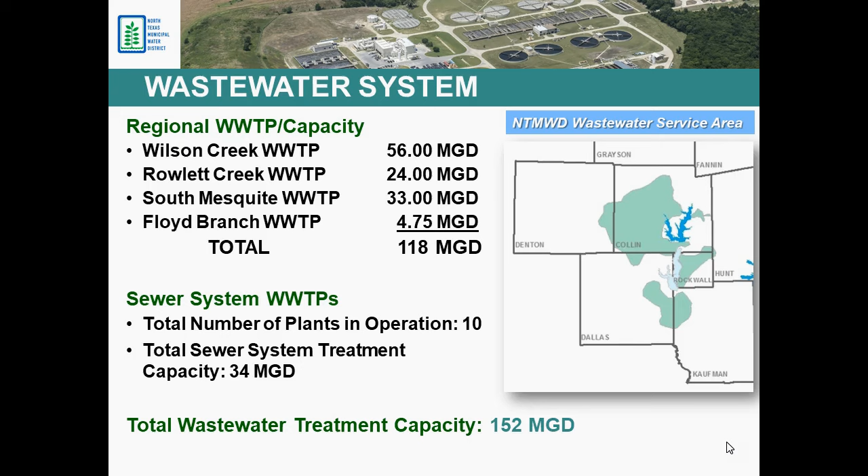On the conveyance side, we take care of mainly the large diameter interceptors. So the communities that we serve primarily have the small diameter retail connections, and then they discharge into our larger lines. There's 4 primary systems that transfer those flows into the treatment plants.

So this is the third of the wastewater systems, the conveyance system. The largest portion of our interceptors are in the Collin County area, up in the Richardson, Plano, McKinney, Frisco type area, and on the north part of the Metroplex.

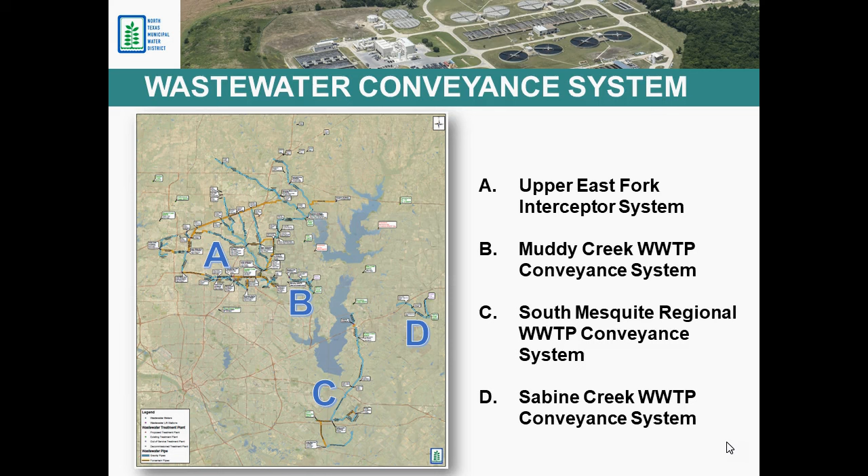I think we all in this room know that what we do in the water industry is really critical for 3 main purposes. So we're really going to talk the rest of the time about the things that we're doing to make sure that we're providing those services.

To be able to continue to protect public health, protect the environment, and sustain economic development.

The reality is a lot of our infrastructure, particularly on the wastewater side, is buried infrastructure. And you all here at ASCE know very well that our report card isn't as good as what it should be on many components to our infrastructure, and on the buried infrastructure side, it's the same.

So there's some areas of the country, including our area, where sometimes the wastewater systems don't do what they're designed to do, and we have sanitary sewer overflows.

Some of the common causes of those are aging infrastructure or things like grease going down the drain when it shouldn't be. Also, there's times when inadequate capacity occurs or there's poor construction methods.

On the wastewater side of things, you all know this very well, I'm sure. During times of peak flow, when we've got rainfall events occurring, it's not uncommon that our treatment plants are seeing 4 times the flow that they do on a normal day.

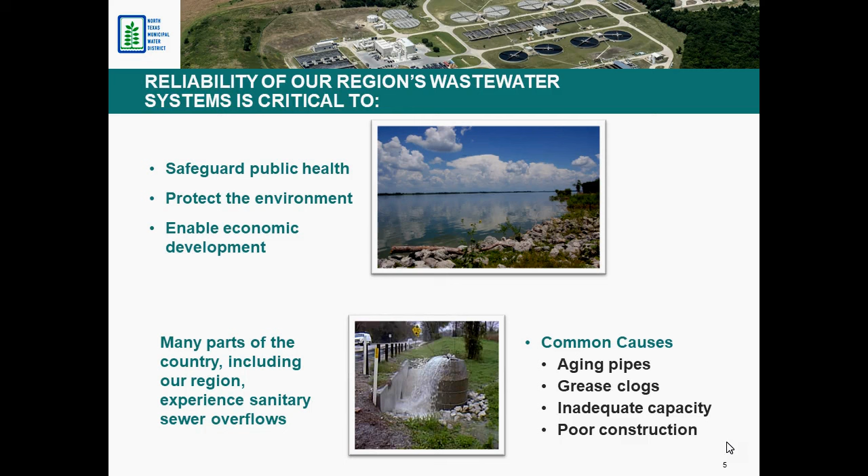For the first couple decades, they were primarily focused on combined systems where stormwater and wastewater combine into a single system. We're fortunate in this part of the world that we don't have combined systems, but we do still have issues with the sanitary sewer system. Over the last decade or so, they've gotten through most of the CSOs and have been focused on separate systems, and continue to look at that.

This is something ASCE is very in tune with. The most recent issue came out on America's infrastructure. The overall score is a D+ now, holding steady at a D+ - back in 2013 that's what it was as well. From the national perspective, wastewater actually went from a D to a D+, so it went up a little bit in the last few years, maybe because of some of the activities going on with the regulators.

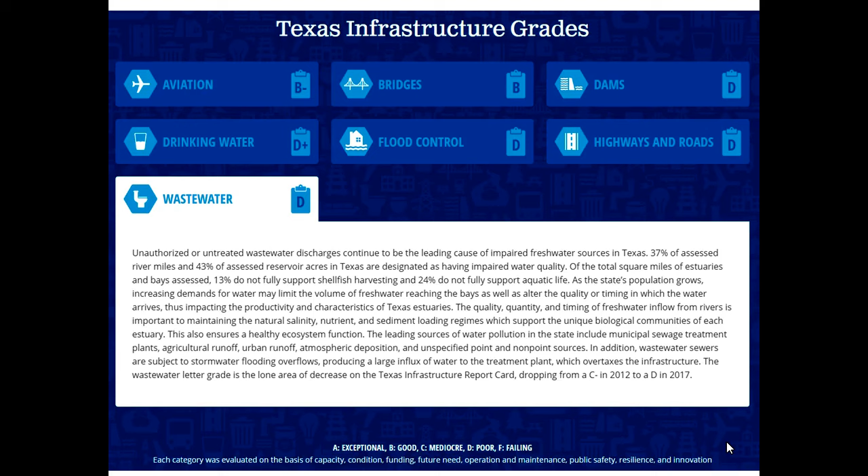Looking at the Texas scorecard, there's a number of different components here: aviation at a B-, bridges at a B, dams D, drinking water D+, flood control D, highways and roads D, and wastewater is also a D. As you read through this, it talks about the primary cause of problems for our impaired fresh water sources in Texas being attributed to sanitary sewer overflows. So even within industry publications in the engineering field, we're recognizing there are issues there.

So what are some of the key solutions? This again is from the ASCE report, and it basically says we need investment, we need leadership and planning, and we need to prepare for the future. That's what we're going to talk about as we go through the rest of this presentation - how the North Texas region is responding to some of the EPA's concerns, which are common with the concerns in this ASCE report, to invest, provide leadership and planning, and prepare for the future.

This is another graph off the EPA's website. Through the end of fiscal year 2016, they wanted to look at every sanitary sewer system in the United States, which totaled 1,103 of them, that produced more than 10 million gallons per day of wastewater, or clean water actually. Side note - what other industry do you know of that's named for what comes in as raw product and not what goes out as finished product? We call it wastewater, but actually what we produce is clean water.

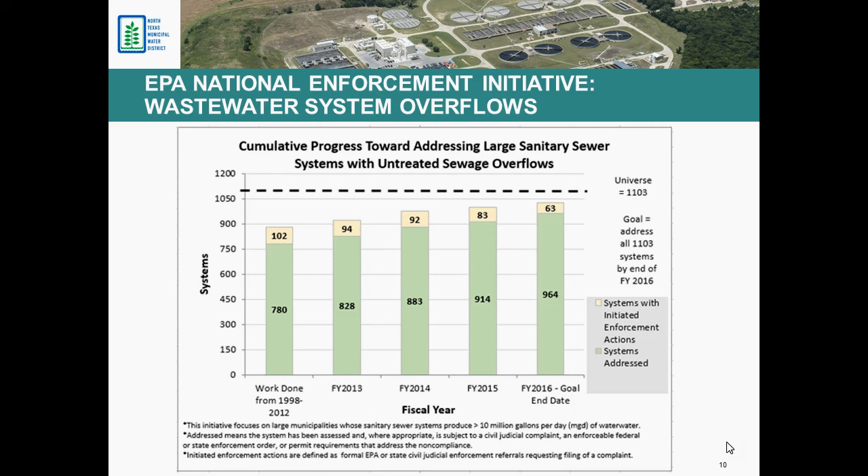So they were focused on the larger utilities that produce more than 10 million gallons per day. In 2013, they had looked at 828 of them, and they were in good shape, but there were 94 at that time that were in enforcement. By the end of 2016, there were still just a handful they hadn't looked at, and we were one of those that wasn't yet accounted for on that chart.

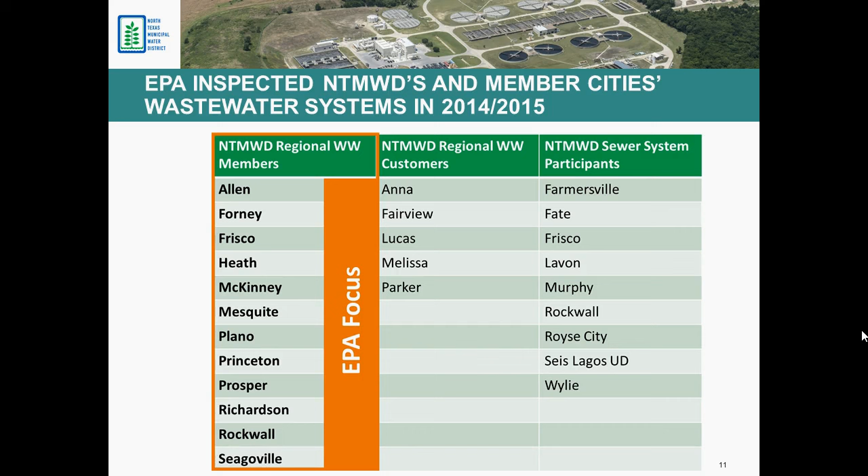Back in 2014 and 2015, the EPA did inspections of the regional wastewater system members and the district. If you think back to how we had two different categories of our wastewater treatment plants - the regional wastewater system and the sewer system - the column on the left is the members of that regional wastewater system. We've got 12 members of that system, and they contribute flows to a treatment plant that is greater than 10 million gallons a day, so it fell into this enforcement initiative for EPA. The cities that contributed flows to those smaller plants, or were customers of that regional system, were not inspected by the EPA in 2014 and 2015.

At the time of the inspections, we tried to figure out where this was going to go, where we were headed. What we determined was there were three basic outcomes that could occur. The most preferred outcome was that the EPA, following our inspection, would send us a letter saying we're doing a good job correcting the identified deficiencies, and that they want us to continue working together as a region to address these items, continuing down the path of CMOM.

The next outcome was an administrative order, administered by EPA Region 6 based here in Dallas. Those are typically short documents, tailored to specific situations, and individual agreements between the EPA and the district, or the EPA and the city. We would expect those to require CMOM implementation and want collaboration with the region.

The least desired outcome was a consent decree. Consent decrees are enforcement actions negotiated with EPA out of Washington, D.C., and the Department of Justice in Washington, D.C. They're very long, detailed documents, typically more than 100 pages in length, and very expensive to implement with very little flexibility. Within the constraints of a consent decree, you have to go to a federal judge even to change the schedule of a single project.

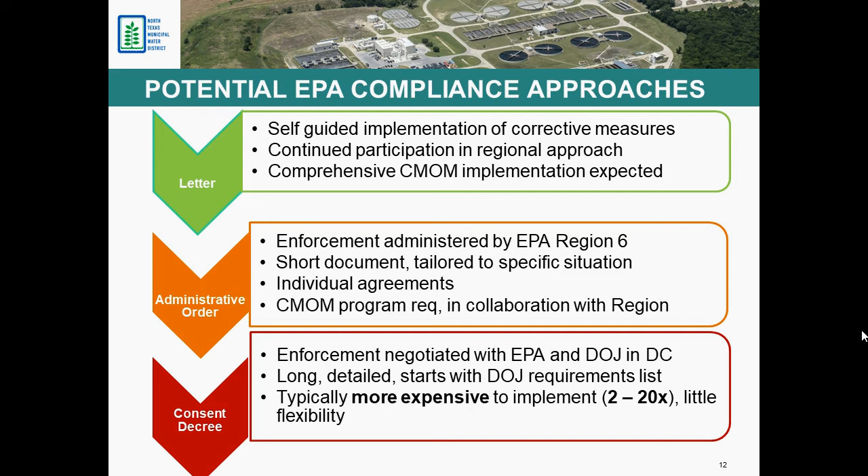Looking at what's going on here in Texas, San Antonio just a few years ago negotiated a $2.6 billion consent decree down at SAWS. The city of Houston has ongoing negotiations in progress—they've previously been under enforcement or are looking to go under enforcement again, estimating the cost of implementing their consent decree requirements at like $5 billion. And the small town of Corpus Christi was getting up near $1 billion, at $800 million. We definitely knew these were expensive price tags, and we preferred to figure out our own fate rather than have the Department of Justice figure it out for us.

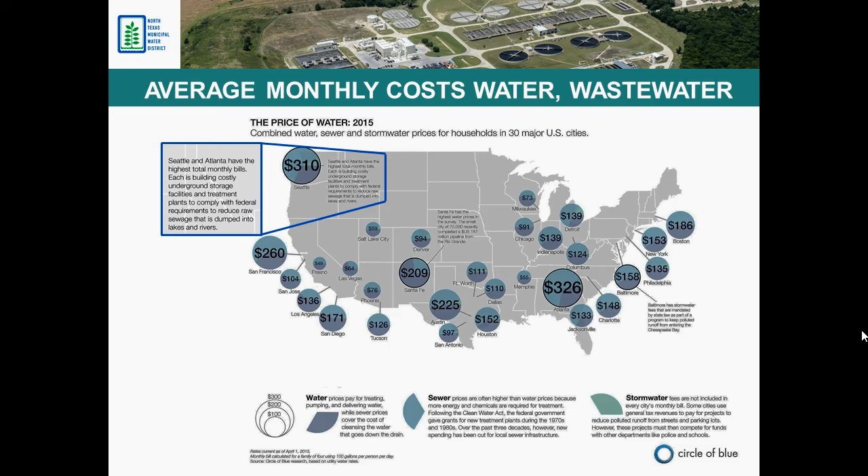If you look at the two most expensive communities shown on this map, they are the city of Seattle and then Atlanta. The caption associated with Seattle reads: 'Seattle and Atlanta have the highest total monthly bills. Each is building costly underground storage facilities and treatment plants to comply with federal requirements to reduce raw sewage that is dumped into lakes and rivers.' So the communities with the highest bills, and the ratepayers paying those bills, that's directly attributed to having to implement consent decrees. So we knew we didn't want that.

So we started trying to gain an understanding of what the EPA was really after, what their concerns were. A handful of concerns really floated to the top. One was regional coordination—they wanted additional coordination beyond what had been happening between the wholesale provider and the retail provider, that is, between the district and the cities. They saw that there needed to be coordination beyond what was currently happening.

Another item was joint capacity management for the regional system. Historically, when looking at capacity requirements for either interceptors or treatment plants, each entity looked at what's happening within its own system, doing rainfall monitoring and flow monitoring independently to figure out what needed to be done from a capacity standpoint. What the EPA was looking for was more joint capacity management between the cities and the wholesale provider, the district.

They also were wanting comprehensive CMOM implementation. CMOM is Capacity Management, Operations, and Maintenance, and we'll go through that in more detail in a moment, to prevent sanitary sewer overflows by both the district and the communities. They were looking for ongoing system maintenance. In particular, they were really interested in whether you understand the condition of your infrastructure, whether you're doing cleaning to maintain it, and whether you're doing rehabilitation where problems are identified through condition assessments. So that's kind of the items that were of the biggest concerns to the EPA.

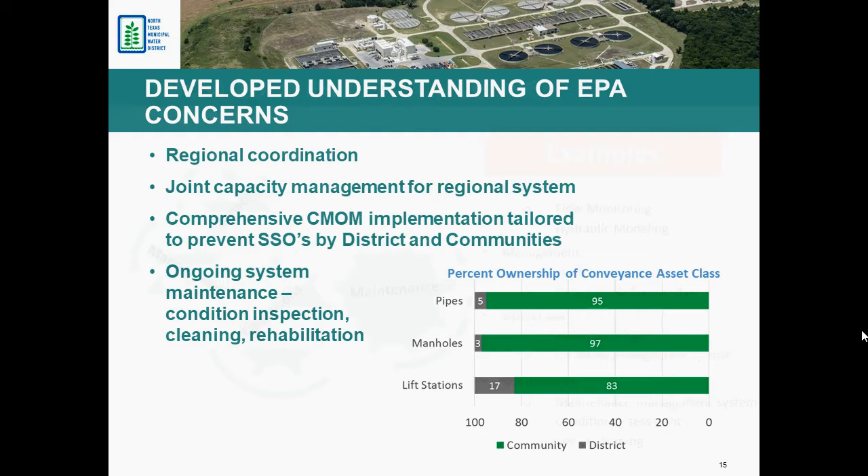So CMOM, we've talked about that a couple of times now. It stands for Capacity Management, Operations, and Maintenance. It's a framework that was developed by the EPA back in the early 2000s. What the EPA desired to do at that time was to mandate that all utilities around the country put together CMOM plans and execute those plans. There was a lot of industry backlash associated with putting new requirements on utilities without additional funding available to implement those requirements.

So the approach taken since that time is really requiring that these type of plans be developed and implemented through enforcement actions. The EPA was not able to get that to be a requirement, so they look for either voluntary participation or they'll have you do it through an enforcement action.

So when we talk about what the items are, it's basically holistically how do you operate and maintain your system. It's a very broad set of plans that talks about capacity — how are you doing flow monitoring, are you doing hydraulic modeling, what are the parameters under which you're assessing your system. On the management side, are you providing proper training to your staff with succession planning, making sure you're going to have qualified staff to operate and maintain that system into the future.

Fats, oils, and grease is a major problem in wastewater systems, where people are putting things down their wastewater lines that they shouldn't, which causes a majority of the overflows that happen within community systems.

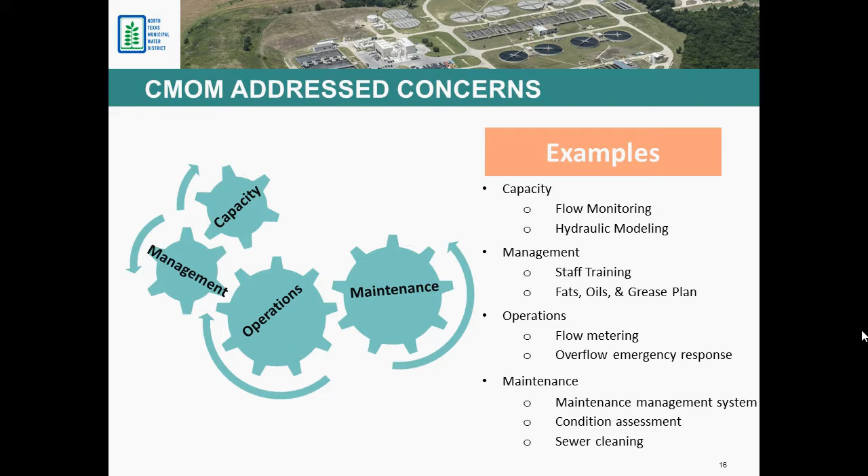All right, so we went through a stepwise approach to understand what the EPA's concerns were, and then put things in place to respond to those concerns. The first thing was we needed to talk more — we needed more regional collaboration than what we had at that time. So we started meeting on a regular basis.

Prior to the inspections occurring, we met on the water side of the house regularly, especially in times of drought, to talk about what water supply availability looked like. But we weren't regularly meeting with our customers, our member cities and customer cities, to coordinate how we work together on the wastewater side of things. So we began meeting monthly with them, and since things have died down, we've gone to every other month — but we established a regional collaboration mechanism.

The next thing we did is we developed corrective action plans for each of our systems. Following the inspections done by EPA, they outlined for us in a written document the deficiencies that they saw. So we had that written down, and we went through and developed corrective action plans to say, here's how we're going to respond to those deficiencies.

Oftentimes when the EPA comes in and does inspections, people close up and become very guarded because there's concern that whatever you say is going to be used against you. We took a little bit different approach than most utilities do, in that we really opened up and said the things you pointed out are things we need to work on. So we put together corrective action plans, and we shared those plans with our member cities and with the EPA.

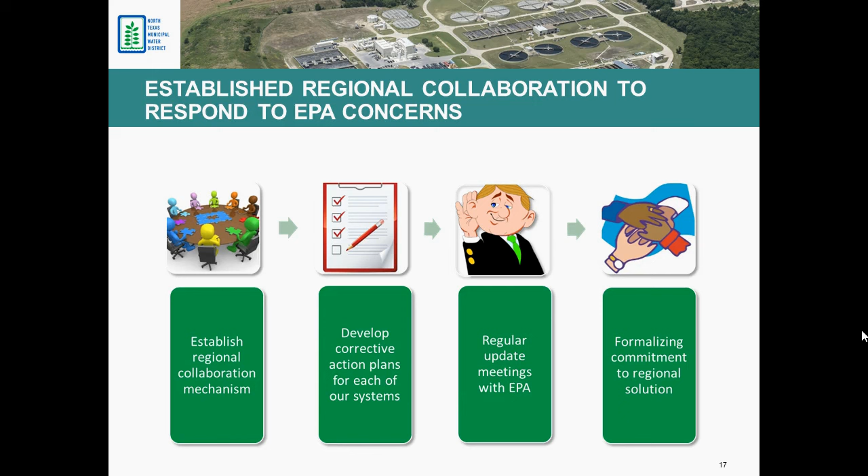And then we formalized our commitment to a regional solution. So we executed a memorandum of understanding with the district and our 12 member cities that basically said we're committed to working together to develop a model regional CMOM program. This was something that provided a tangible document. In many cases it was taken to boards or councils, and in some cases the city manager already had the authority to sign it. But it was a tangible way for the EPA to know that we're all on board and committed to working together.

What we really wanted to do is have a forum where we could work together and figure out what our desired outcomes were from this inspection. Us at the utility level, and utility managers, we often know what we need to do, but we don't have the funding resources to make it happen. So we knew this was, in some ways, a chance to escalate the need to our governing bodies and talk with them about what is needed to meet EPA's expectations and provide that reliable service.

We wanted a chance to work together, the 13 of us, to figure out our desired outcomes from this. The model program that was developed provides consistency between how we're doing things amongst us, but understands there's unique implementation requirements within each community. If you're a community built primarily in the 60s with 80% clay pipe in your system, your needs are going to be a lot different than a community built since 2000 that's almost all PVC pipe. So there's quite a big variation in what the needs are, and we understood those implementation requirements were going to be very different between them.

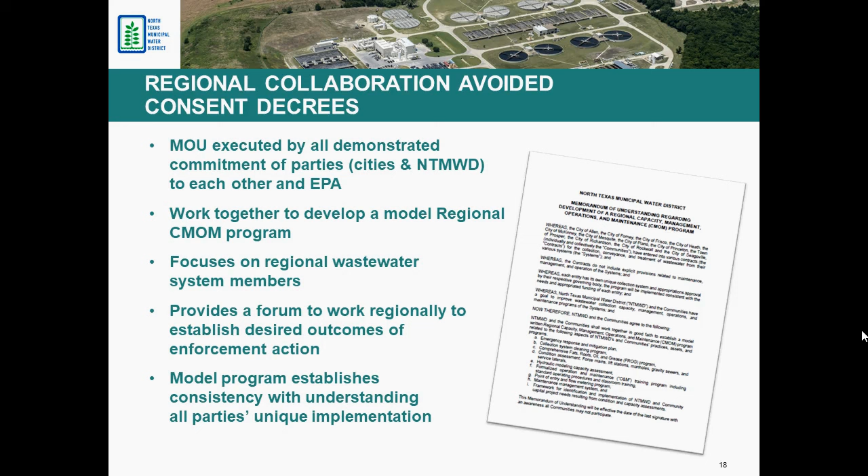So regional collaboration avoided consent decrees, but required CMOM implementation. We talked before about three potential outcomes that could have occurred, and the least desired was a consent decree. Well, zero of the 13 parties got a consent decree, so that was a very good news story.

There were 6 of the parties that received a letter, and what those letters said was that continued participation in the regional approach is expected, and that CMOM development and implementation is also expected. So basically those 6 entities were able to demonstrate to EPA that they know what they need to do, and they're going to move on and do it without EPA having to put them under an enforcement order.

There were 7 parties of the 13 that did receive administrative orders. Those were issued by EPA Region 6, and they expected that continued participation in the regional approach would occur, and then they required that those cities develop a CMOM plan within a 12-month period.

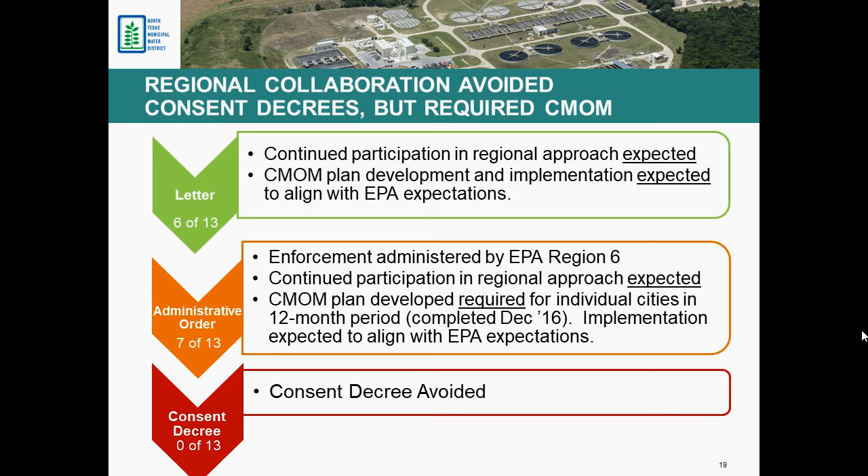Those were developed by the end of last year, 2016, so we're coming up on almost a full year since those were developed. What was really cool to see was all 13 parties basically said, hey, we're going to do what those that got the Administrative Orders were required to do. So of the 6 parties that received the letters, they went ahead and developed their CMOM plans as well, even though they weren't necessarily required to.

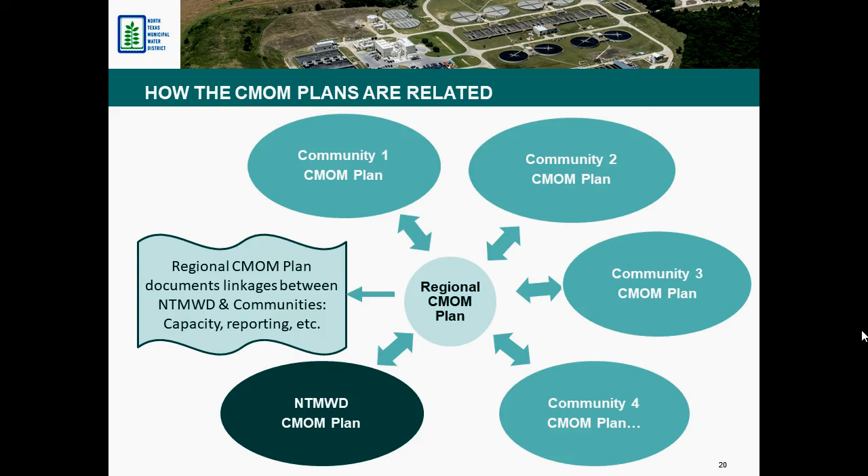There's a number of written documents that were produced out of this. We talked in the MOU about a regional CMOM plan, and that's shown at the center of this diagram. The regional CMOM plan documents the linkages between the district and the communities for things like how do we jointly manage capacity, and how are we going to do our KPI reporting at the end of the year. Each individual entity then developed their own plan applicable to how they operate and maintain their system.

So how did we have consistency between these? If everybody just goes out, 13 parties, trying to do this quickly, a year's pretty fast to develop a real comprehensive plan for how you manage your system. So we put some things in place to help bring that consistency we're looking for. The first was a CMOM outline, and for those that received Administrative Orders, that was a 120-day submittal required of them. That was something we developed together.

Then there was a model CMOM plan, basically a guidance document issued at the same time as the outline, so that whenever we're talking about section 2.3, everybody's section 2.3 lines up. It was basically a guidance document giving the rough outline of the report. Then the CMOM plans with information unique to each community and to the district were developed independently by those parties.

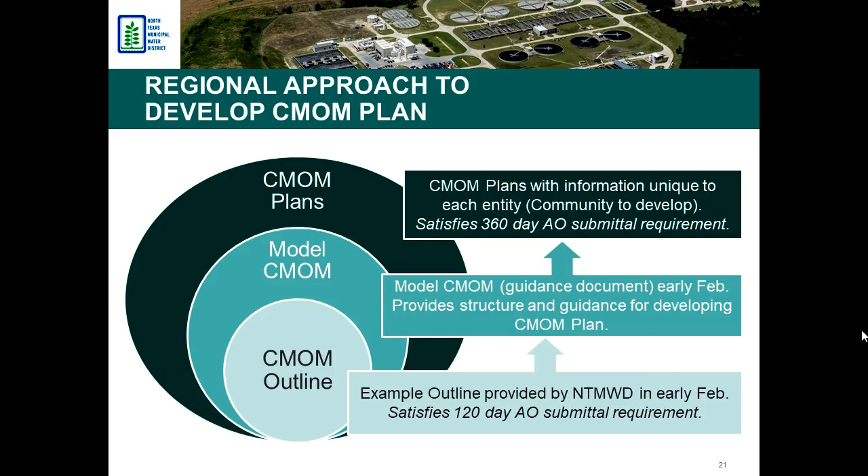One of the things we really spent time on in these routine meetings was coming together on what are our objectives, what are we really here to do. We went through exercises where we posted things on walls with Post-it notes and tried to bring everybody together on what the most critical things we do are. This is what we ended up with for objectives.

The first several objectives are really around joint management of capacity. That was something the EPA had picked up on and was important to them, and as we got in the room workshopping this stuff, we found the same thing. So the very first item on the list is to identify, evaluate, and address areas of excessive inflow and infiltration in the wastewater collection system. I&I, inflow and infiltration, is something we really struggle with in the industry, and when we're having to convey and treat excessive amounts of stormwater during storm events, it really strains our system.

There were a number of other things I won't go through in detail, but something worth mentioning, and that we're really getting going on now, is the very bottom line: communicate with and educate the public about how their activities can impact the wastewater collection system.

We're very fortunate in the North Texas area that Dallas Water Utilities has done a fantastic job of this over the last few decades. They started with the Cease the Grease campaign back in the 90s, then modified that program in the last several years to be Defend Your Drains, where it's not just about grease, but also about not putting wipes down the toilet, or pharmaceuticals, or household cleaners, those types of things. Dallas Water Utilities put together this great program that's gotten a lot of traction over the last several years.

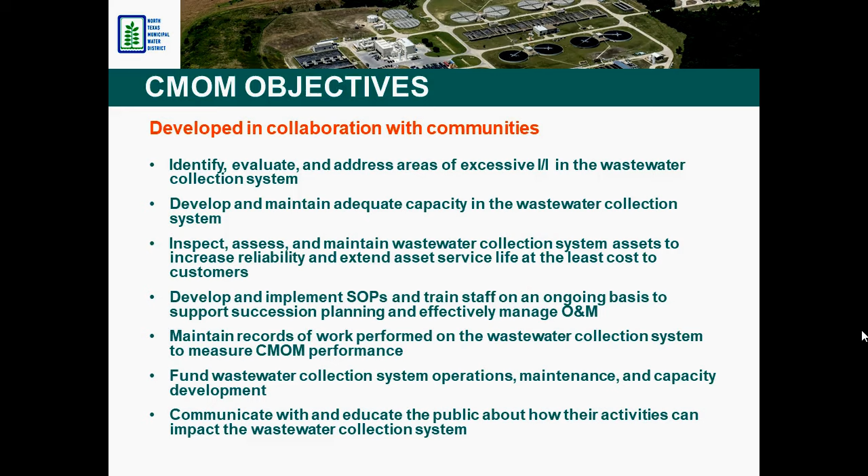A few examples of what's included in the regional CMOM coordination plan: it documents the linkages between the district and our cities, with standard operating procedures that have been put in place. One is the request for wastewater connections and point of entry protocol.

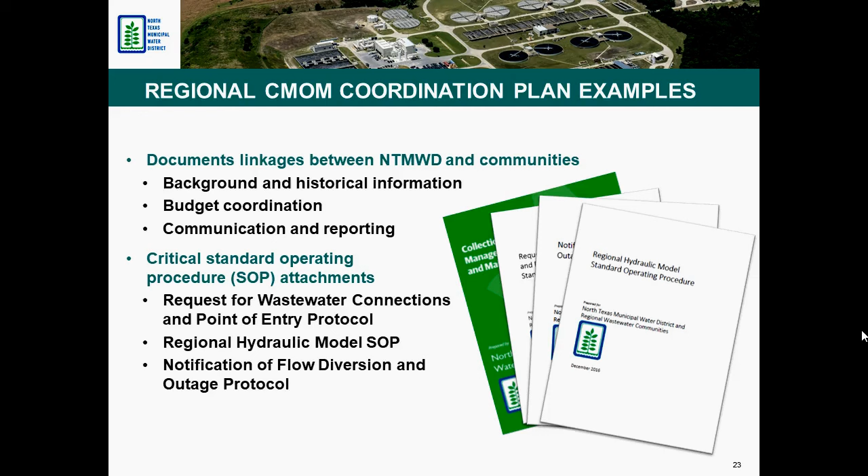Another critical piece is the hydraulic modeling SOP, and then the notification of flow diversion and outage. There are times when either the city can negatively impact the district system or the district can negatively impact the city system, so we've got a protocol in place to document those occurrences.

So we've got our plans in place. We completed ours at the end of last year, and we wanted to give you a glimpse at some of the major initiatives we've done in year one to implement our plan. One is lift station condition assessment. We've got 23 lift stations that convey flow from the communities into our treatment plants, and they had never had a thorough condition assessment conducted on them. The operators look at them regularly, and if something's broken, we know to fix it, but we had never really gone through and done a thorough condition assessment. So we started with a rapid assessment.

We had an engineering consulting firm helping us through this. They brought in their experts, and we went around to every one of those lift stations, bumped the pumps to check for vibration issues, and looked at all of them in a rapid fashion. Then we identified which ones needed a more detailed look from a vibration standpoint. We did detailed vibration testing of 7 of those lift stations based on the rapid assessments, and also did more detailed field assessment, focusing primarily on the mechanical components rather than the architectural ones. We used that information to prioritize needs for capital investment, and we'll be nominating those for our capital improvements plan.

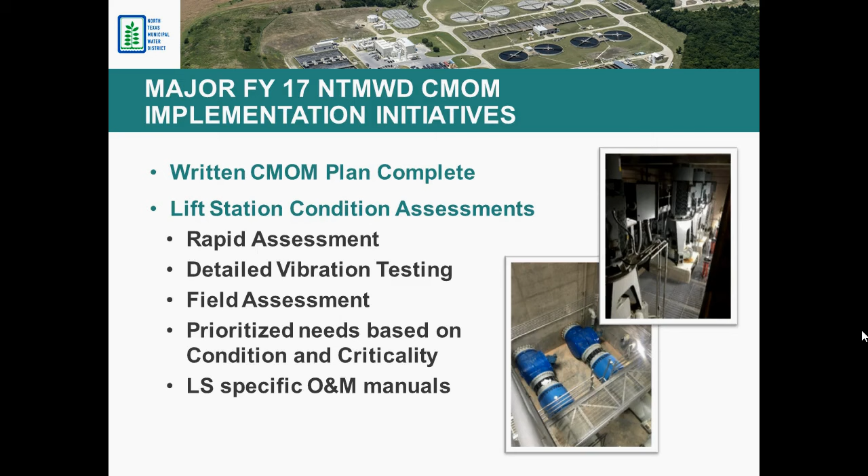That covered lift stations, which are more on the vertical asset side. On the linear assets, we also began a pipeline condition assessment program, with a goal to assess all of our pipelines on a 10-year cycle, meaning we need to do about 10% of them a year. We got a really good running start on that this last year, and set up our program to manage that data effectively.

When you start doing this inspection work—previously, we had somebody whose desk drawer was full of CDs of CCTV data, and it wasn't really accessible in a practical way. So when we started this off, we said we need to make this information accessible, so we can really use it and make it visible to the folks who need it.

So we got that program in place. We decided to go beyond the traditional CCTV. The traditional route to doing a program like this is you clean every foot of your pipe so you can see what's going on, then you stick your closed circuit TV, CCTV, through it, and you look and see what you can see visually, and you score it based on what you can see visually. What we decided to do was a little bit different.

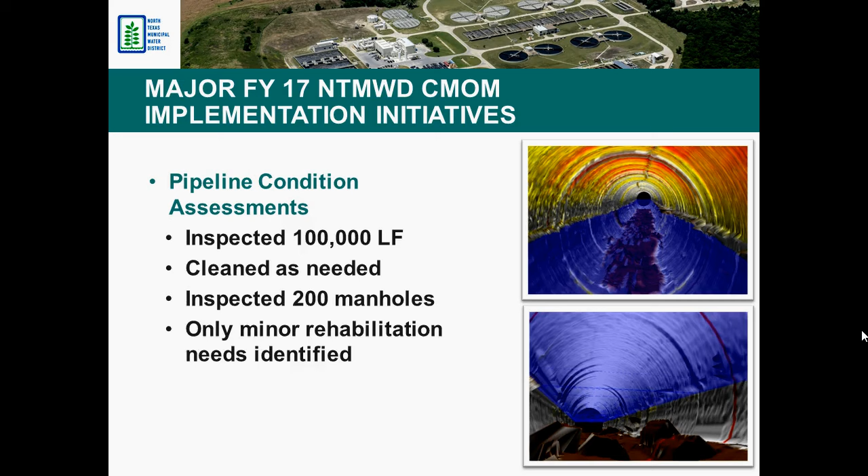All right, so let's see. Another major implementation initiative is on the capacity assessment side. We've said a number of times we need to jointly manage that capacity. So the first step in what we've been working on this past year is historically we've only modeled our infrastructure within our hydraulic model. But as part of this program, we're going up into the city system and actually modeling a portion of their system where those critical interfaces occur. It's going to be a multi-year process to be able to get through all of that work.

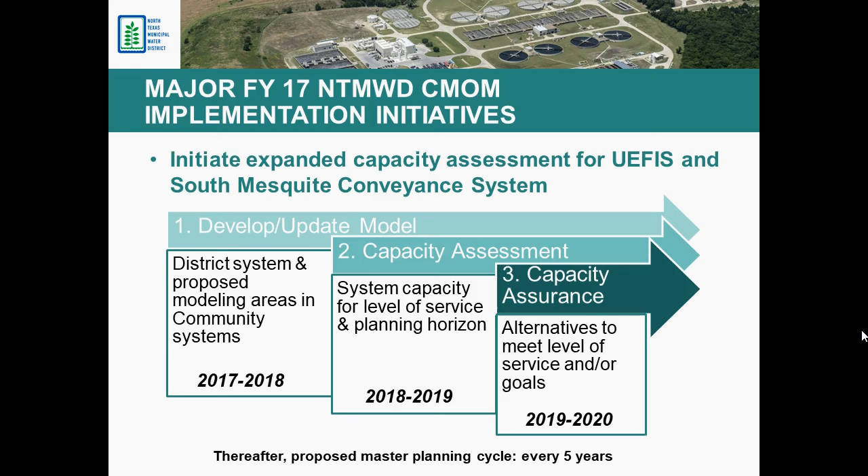We're going to be doing flow monitoring this next spring to really start understanding what kind of system response we're seeing. And then by 2019, 2020, we can start actually making decisions on are we going to continue to upsize to convey all of the stormwater, or are we going to try to eliminate some of that stormwater from getting into the system and not have to increase the capacity of the regional system as much?

All right, so the collaborative regional approach has yielded some positive results. It's allowed local utilities to determine the necessary investments to provide safe, affordable, and reliable services. We know what we need to do within our systems, and we have been able to continue to figure that out rather than having others out of Washington, D.C. tell us what we need to do.

We've also got a framework in place to avoid future enforcement by implementing sustainable practices. So if we all go out and execute our plans, we'll probably be in pretty good shape. So we've got that framework in place.

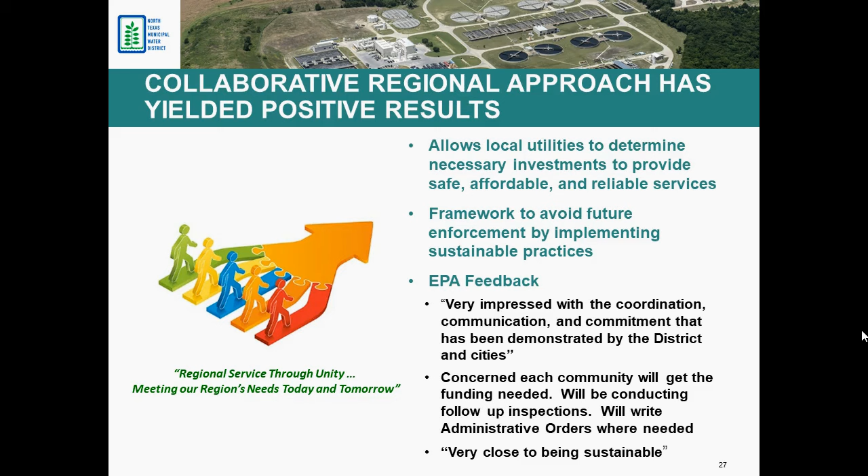We met with the EPA in January to basically share the results of what we had done the previous year, and this is the feedback we received. They were very impressed with the coordination, communication, and the commitment that has been demonstrated by the district and the cities, but there was some concern that each community would get the funding that they need. So they did indicate they'll be doing some follow-up inspections, and they would be available to write us administrative orders as needed. But they did think that we're very close to being sustainable, and that's really what we need to do, is be able to provide that sustainable, reliable service.

So with that, I think that kind of wraps up what I had prepared. I don't know, y'all may not have time for questions. Let's do...